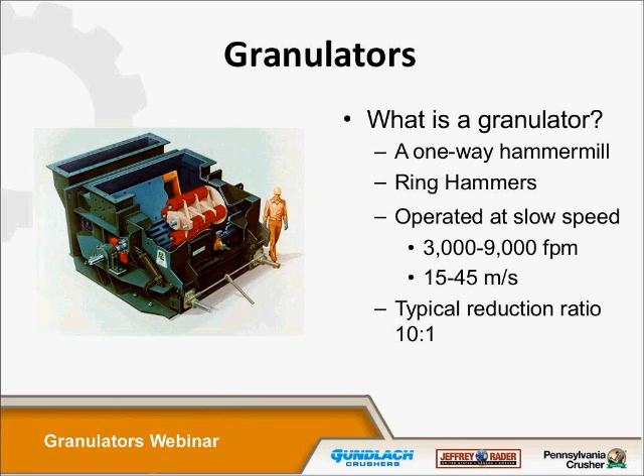Our presentation today is on granulators. Granulators are a very interesting product for us, a very old product. We have about 1,800 to 2,000 granulators in installation or in service throughout the world. What is a granulator? It's a one-way hammer mill with ring hammers, operated generally at slow speed of 3,000 to 9,000 feet per minute, or 15 to 45 meters per second. Typical reduction ratio is 10 to 1.

Granulators are typically used to reduce friable material. 95% or more of them are used to reduce coal. Input size is usually 6 inches or less, though it could go up to 12 inches in some applications. Our heavier duty models can go even 18 inches of input size. Typical output size is 1/2 inch or 12 millimeter up to even 2 inches.

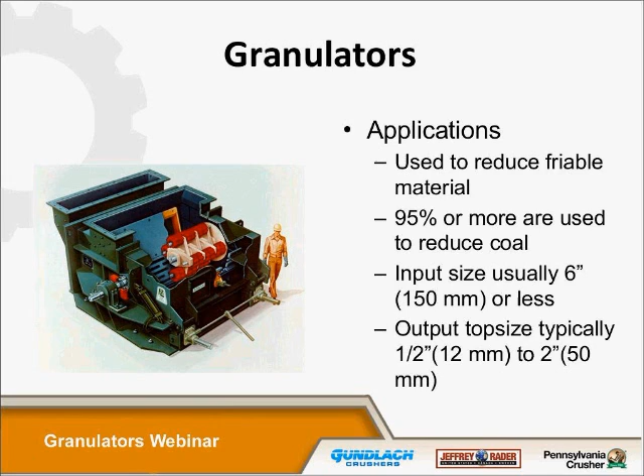Usual applications are in power plants, for instance PC boilers, pulverized coal boilers. These are the primary crushers at a power plant, usually preparing the fuel for the pulverizer, reducing the fuel from the train or the barge to prepare it for the pulverizer, and then from the pulverizer the coal gets blown into the boiler.

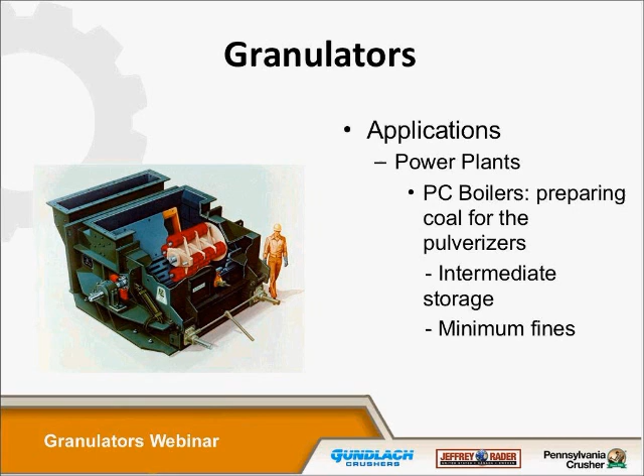Can also be used to reduce the coal prior to storage. An advantage is this type of machine gives minimum fines production, therefore less coal would be blown around on the coal pile.

Other applications would be a fluid bed boiler, in which case the granulator would be the final sizer before the boiler. It's a different type of boiler than the pulverized coal boiler, so product size from the granulator is a lot more critical with fluid bed boiler application.

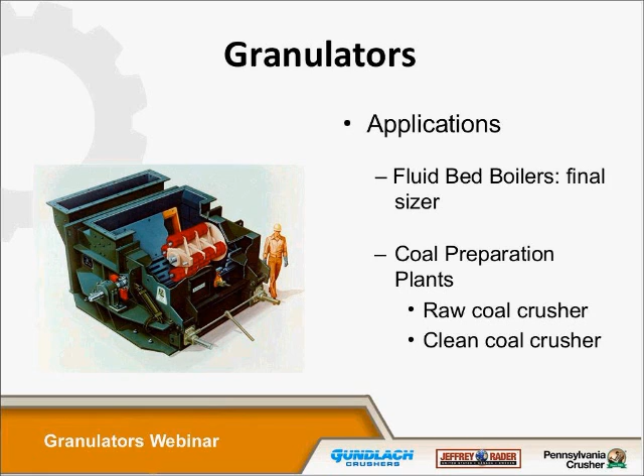Yet another application would be a coal preparation plant. Granulator could be used for crushing raw coal or even as a clean coal crusher to further allow processing of separation of the rock from the coal.

Now, referring back to Jack Loeb's original webinar, Crushing 101, we will look at the reduction methods that granulators use. Initial reduction is done through impact. As you can see with the arrow at the top, the hammer comes around, impacts the coal, and then the hammer rolls across the bed of coal and further crushes through rolling compression.

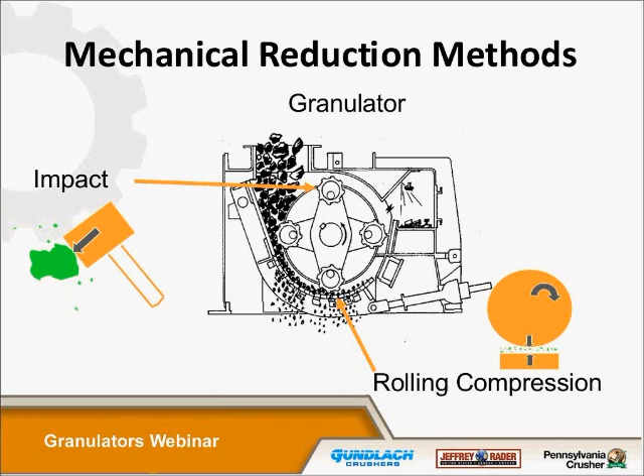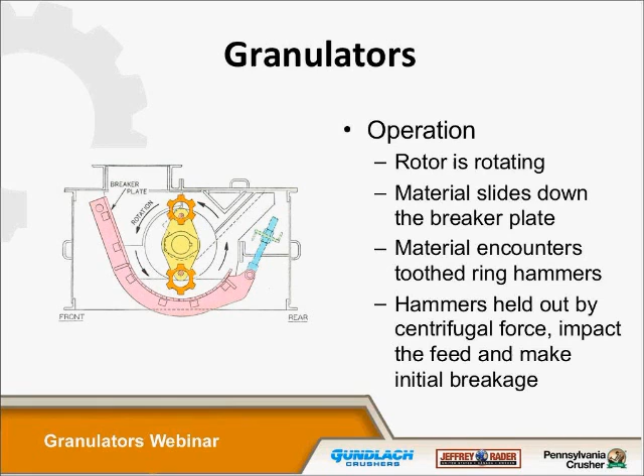General operation of a granulator: as the rotor rotates, you can see on the slide the rotor rotates counterclockwise. The material slides down the breaker plate, then the hammers encounter the material or impact the material. The hammers are held out by centrifugal force, impacting the feed and making the initial breakage. The hammers then begin to rotate on the bar, and as I mentioned before, you get rolling compression and further reduction.

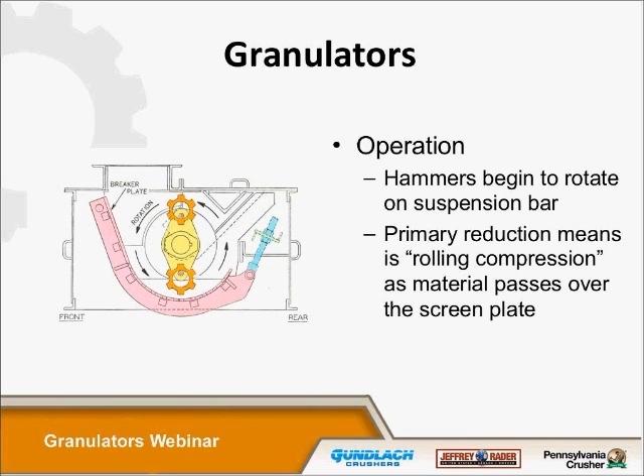The material is sized as it passes through the openings. All the material must exit through the screen plate, which means if there is a piece of uncrushable material in the feed, such as iron, then it will not exit through the screen plate if it is larger than the opening of the screen plate, in which case we allow the uncrushable material to be caught in the tramp iron pocket.

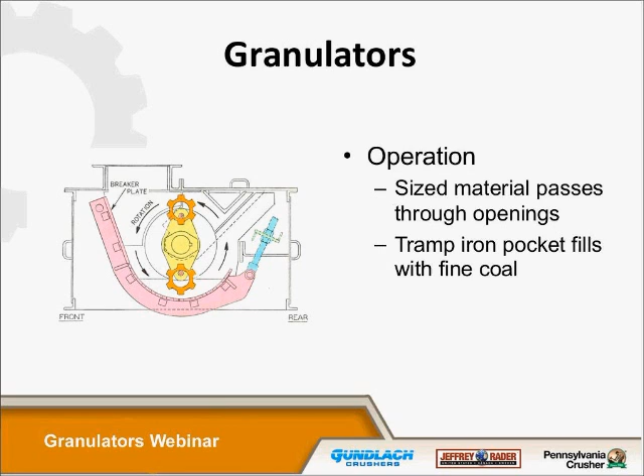Now this tramp iron pocket fills with coal fines. The coal fines actually absorb all of the energy that this piece of tramp iron would have. The tramp iron acts as a projectile, and the coal fines that fill up in the tramp iron pocket absorb that energy from that projectile. The uncrushables strike the deflector plate and become embedded in the tramp iron pocket.

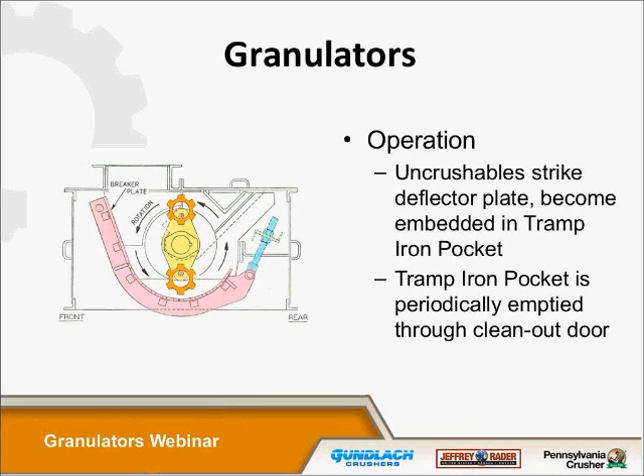Periodically, the tramp iron pocket needs to be emptied through the clean out door, which is on the right side of the picture. This tramp iron pocket typically is emptied once a day, could be emptied once a week. It really depends on the plant's operating procedures and the plant's experience of how much tramp iron they receive.

Operation is controlled by, the output size is controlled by screen plate openings. The openings vary with the type of coal and the product size required. Rotor speed also impacts the sizing, and the cage setting also impacts the sizing. So with a granulator, there are 3 methods of product size control: screen plate openings, rotor speed, and cage setting.

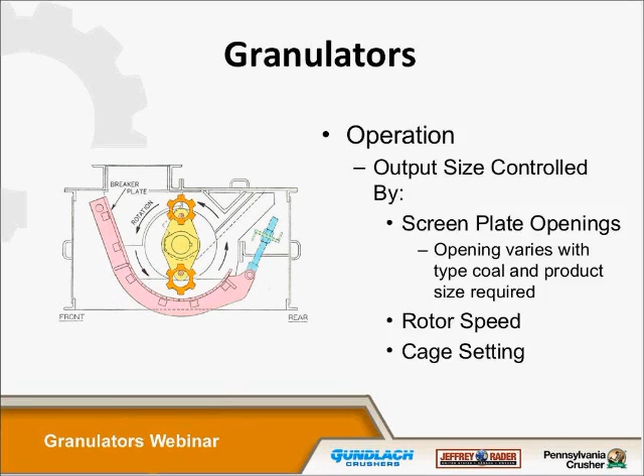Now, to adjust the cage: it is adjusted to compensate for wear of the crushing elements. It provides a little bit of variability in the product size.

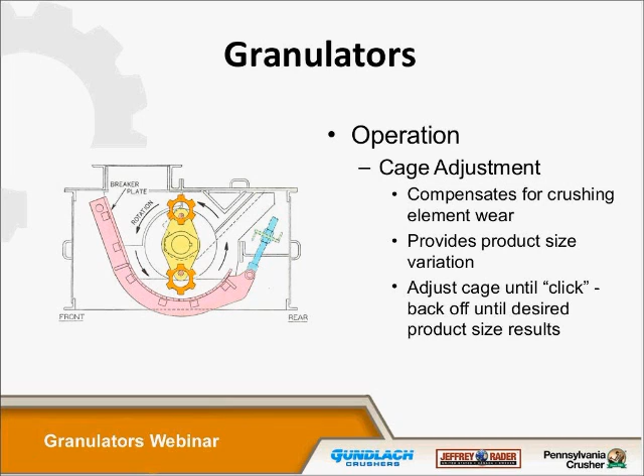Generally, the way that all of our crushers, our hammer-type crushers, are adjusted is by not feeding coal. You run the crusher empty, and then the cage is adjusted up to the point at which the cage starts to click the hammers. From there, the cage is backed off. The amount that is backed off depends on the plant's experience. It could be backed off 2 turns to get the correct product size at one plant, or at another plant they may determine 20 turns is the correct amount to back it off.

Now, the types of granulators that we produce are the TKK, which we will be discussing further on in this webinar. We also produce the TK, a machine designed for heavier feed, larger feed sizes, also for primary crushing applications. And very rarely we produce the JRK, which is a very small, almost a lab-size crusher.

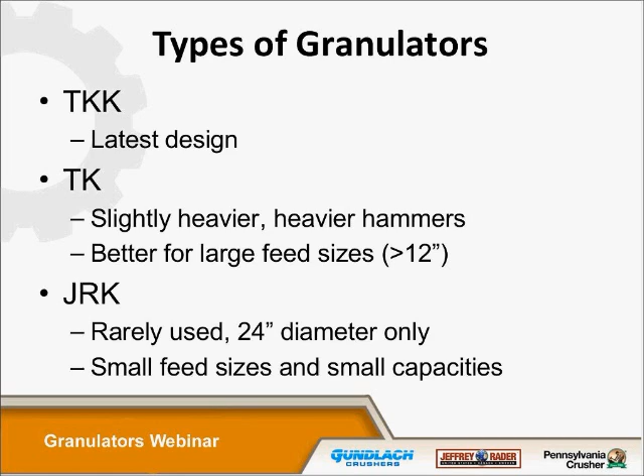Our model designation, as you can see at the bottom, is TKK, then the diameter of the rotor with the hammers extended, and the width of the screen plate designated in inches. For instance, a TKK 26 by 30 is a 26-inch diameter rotor and 30 inches wide.

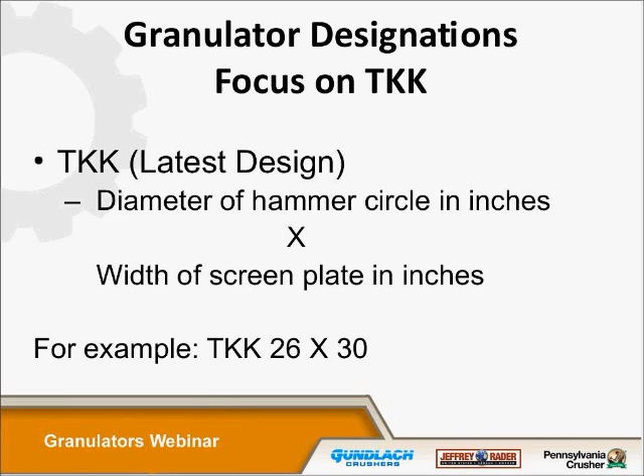Now, within the TKK, there are 3 designs. The largest design is the 44-inch and larger, so that could be a 44-inch rotor diameter, 48-inch rotor diameter, 60-inch rotor diameter, or even 72-inch rotor diameter. This design has 4 rows of hammers, typically a staggered pattern, which means the first row has a space between the 2 hammers, and then the second row fills in that space as the rotor rotates. So it's a staggered arrangement, and the hammers are typically 45 pounds.

Also the rear quadrant is hinged, and you'll see a picture of that. And we also have rear adjustment, or adjustment from outside.

The 36-inch diameter design has 3 rows of hammers, in-line arrangement, so it is not a staggered pattern. The gap between the hammers on the first row is not filled in by the second row of hammers. This is impossible since there's only 3 rows of hammers. Typically 27-pound hammers in the 36-inch diameter rotor, and we have a rear quadrant which is hinged.

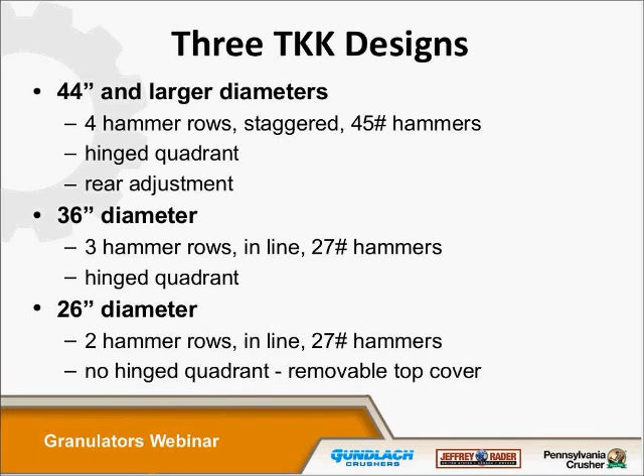On the 26-inch diameter, we have 2 rows of hammers. It's again an inline arrangement, 27-pound hammers, and no hinged rear quadrant. But because it's so light, we can remove the top cover by hand. And you'll see more pictures of each one of these designs.

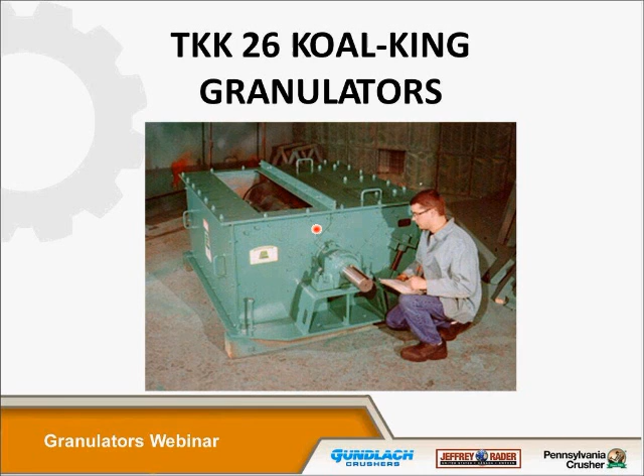Here is the cover for the rear quadrant, or the tramp iron pocket. Removing this cover, you'll be able to see the hammers and replace the hammers as needed. So further on, you'll see the fabricated steel shapes. Basically, it's a pretty simple design. The frame is made of fabrication, welded steel plate.

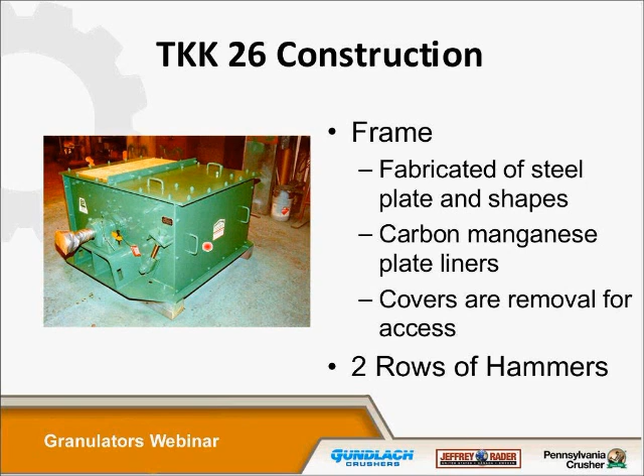We have carbon manganese plate liners and covers over the access panel, as I mentioned before. The rear quadrant cover here, and this is the cover for the tramp iron pocket.

Now the 36-inch granulator obviously is a larger machine. With this machine, you can see, again, this is the rear quadrant. So this rear quadrant actually is hinged at this point here, so the quadrant will actually open up. So someone could actually stand inside here with this rear quadrant open and work on the hammers, replace the hammers.

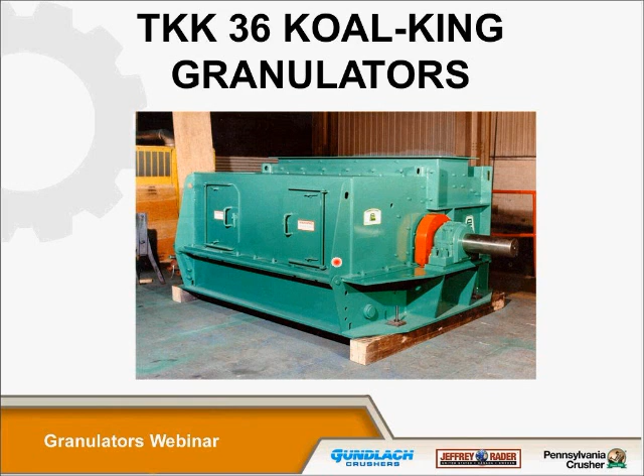Also shown here is the tramp iron pocket doors. So these doors can be opened on a daily basis. Again, the frame of all of our TKKs are fabricated steel shapes, welded together, with carbon manganese plate liners and a hinged rear quadrant.

You can see here a picture of the rear quadrant actually open. You can see at the bottom the hinge portion of the rear quadrant. You can also see there is very good access for the client to get to the rotor and lift the rotor up and out of the way as needed. The rotor doesn't always need to be lifted out of the way to replace the hammers or even to replace the screen plate, which I'll discuss further.

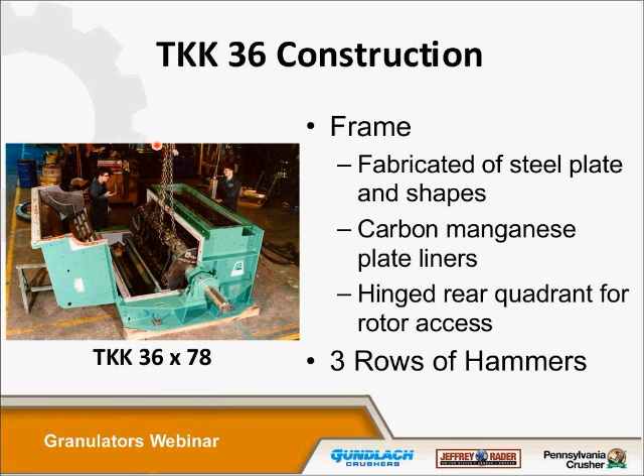Again, looking at the largest design of our TKK model, we have a frame, fabricated steel shapes, carbon manganese plate liners, hinged rear quadrant for rotor access and rotor removal. And on this model, we have an optional hydraulic door opener, which you can see right here. We have a hydraulic piston. This is a nice option for customers that are concerned about safety.

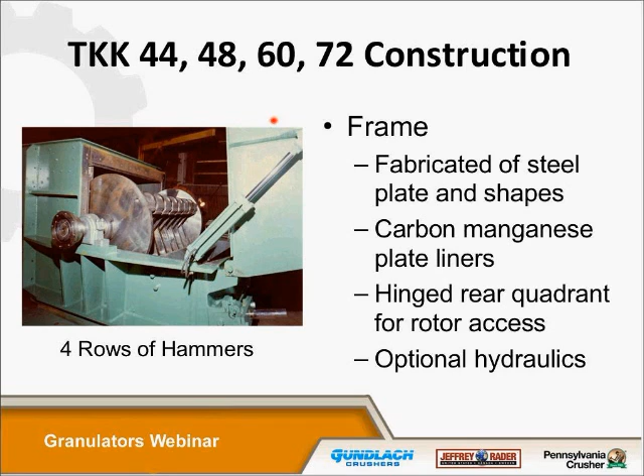Very simple operation. Previously, the customer would have to open the rear quadrant by suspending cables or chain from above. The customer would pull the chain, coming from one direction to open it. Once the center of gravity passes the hinge point, they would have to have a second chain from the other direction to keep it from falling down. So having the hydraulic door opener is a nice feature.

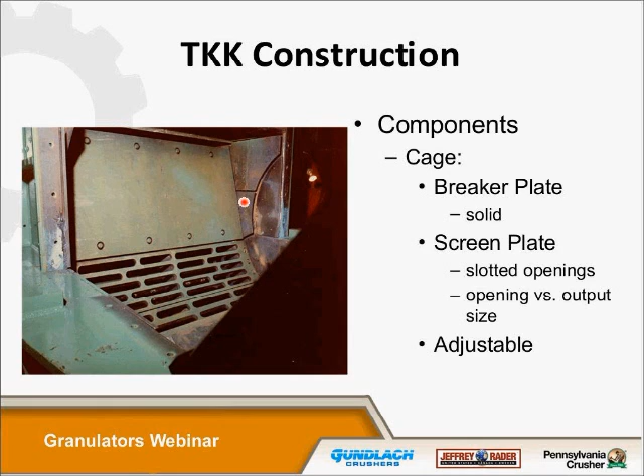Removing the front door of the granulator, you can see the back of the breaker plate and the cage frame. You'll also see the pivot point at the top.

So to remove the cage frame, if you would ever have to do that, the saddles of the cage frame can be unbolted and then you pull the cage frame directly out of the page.

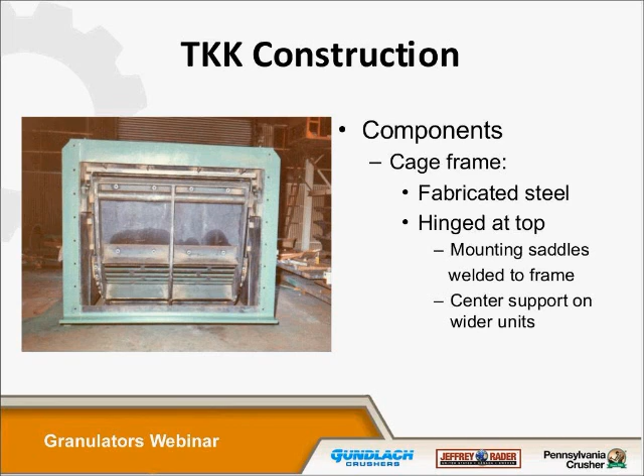On our larger units, you'll see a center support, which is necessary as the breaker plate gets wider. On our smaller units, you'll see we have adjustment for the breaker plate from the outside. This is a picture of the 26-inch granulator, so it's a very simple hand adjustment. There's an adjustment mechanism on both sides; here you see only one.

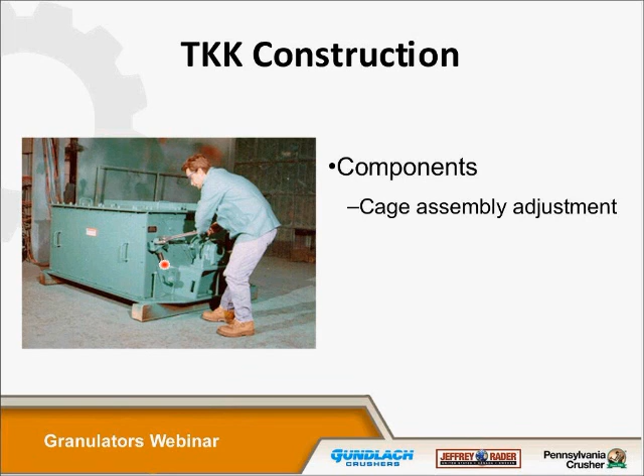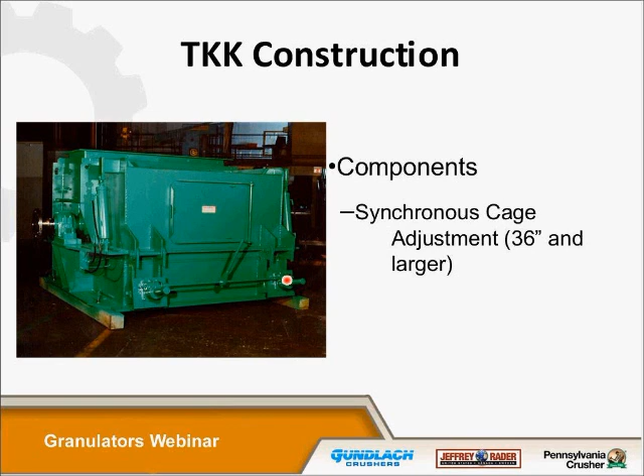On the 36-inch and larger, we have adjustment again from the outside, but a single point adjustment. Here is a picture of actually a 44 or 48-inch TKK granulator, and it actually has what we call synchronous cage adjustment, which is two gear jacks and then a ratchet device linked between the two. Therefore, only one point of adjustment on the largest units.

Again, this gives you a picture of what I was discussing earlier about the removal of the cage. The cage can be removed by removing the front door and then pulling the cage out from that side. This can be done without disturbing the rotor if need be.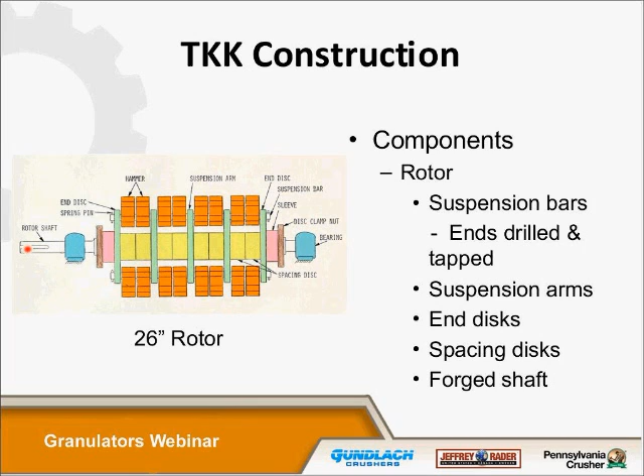The suspension bars are held by the suspension arms or suspension discs. In between the suspension discs, we have spacing discs, and at the end of the rotor stack, we have a disc clamp nut and a sleeve to compress the stack together. And then, of course, we have bearings on either side of the rotor shaft, and the drive connection, a keyed drive connection.

On the 26-inch granulator, you can see you remove the top cover and then the side frame, and you can easily remove the rotor from the cage frame. And the feed chute above does not need to be removed, which is a feature that a lot of our customers really appreciate. Saves them a lot of work.

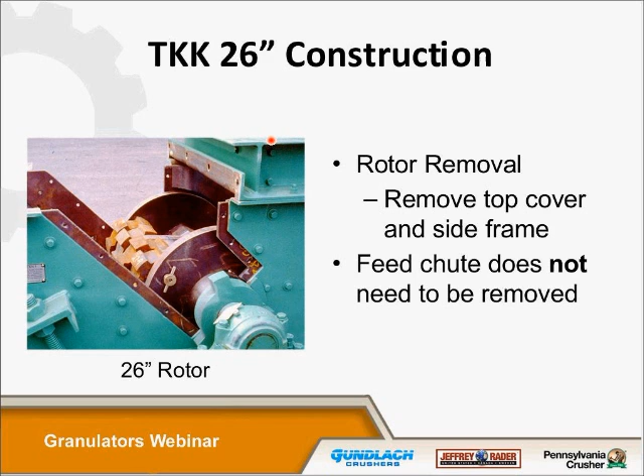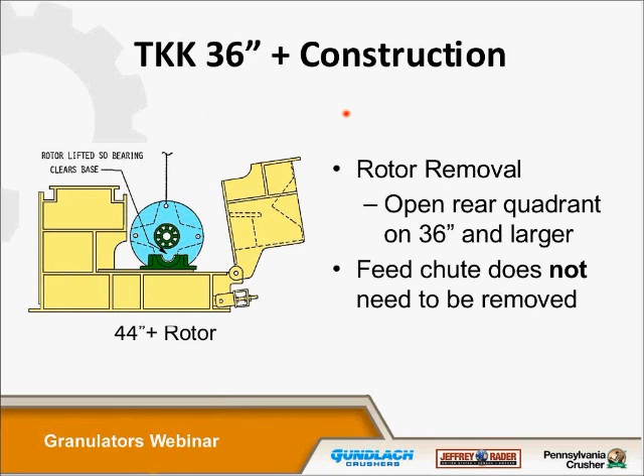On the 36-inch and larger, rotor removal is done by opening the rear quadrant, and then you can see you slide the rotor to one side, and then you lift the rotor out. Again, the feed chute does not need to be removed.

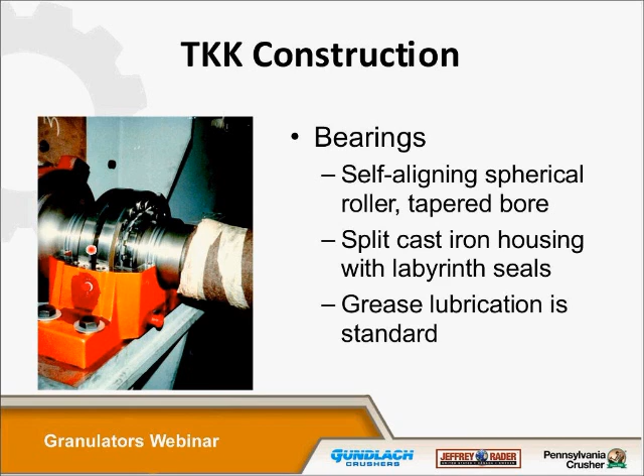Looking further into our bearings, they are self-aligning spherical roller bearings with a tapered bore. They're split cast iron housings with labyrinth seal, and the lubrication is done by grease, which is our standard, although we do infrequently do oil as required by the customer. Here you can see what the tapered bore looks like on the bearing race and the shaft.

We use a tapered bore, which will allow us to also pre-drill the bearing, the shaft, for hydraulic removal of the bearing. So you connect oil pressure here, and it pumps oil into the inside of the bearing race, and that pressure from the oil actually expands the inner bearing race and allows the bearing to be easily removed.

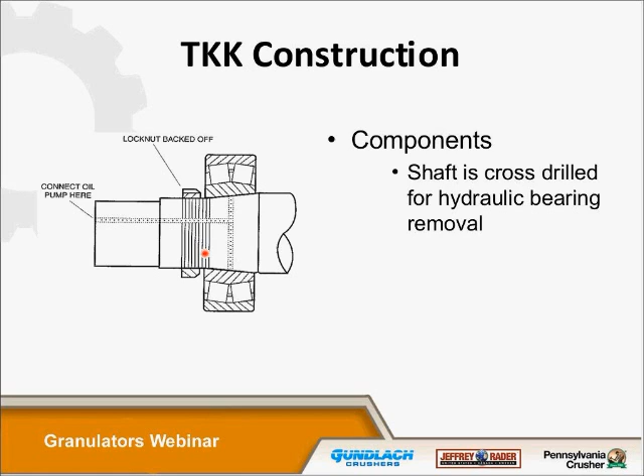Our ring hammers are forged alloy steel, heat treated to 300 or 350 Brinell hardness. Generally we have teeth on our hammers. The teeth allow the hammer to rotate along the bed of material, again to help promote crushing, the rolling crushing effect.

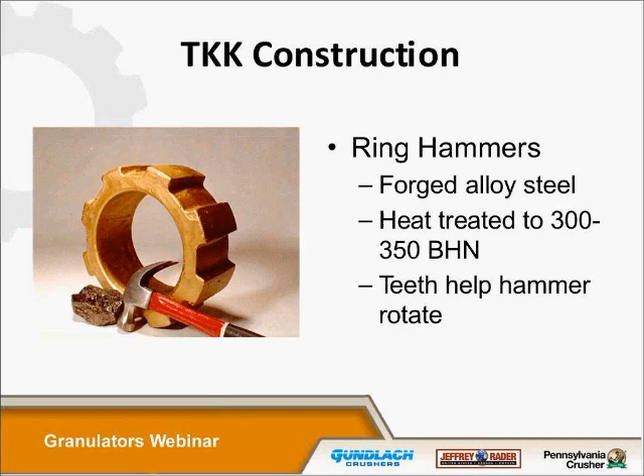So feeding requirements for a granulator are slightly different than a center-fed machine. If you tuned in on the impactor presentation or the hammer mill presentation, we want the feed to drop from a zero vertical or zero horizontal velocity. With a granulator, we want the material to slide down the breaker plate or slide down the feed chute into the crushing chamber, and typically we like to see 70 degrees on that angle, and 48 to 84 inches of drop height to allow for enough speed for the material to enter the hammer circle.

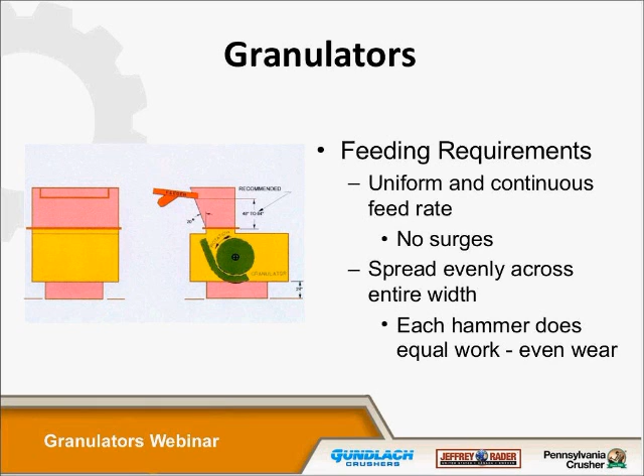We also want to see even feed all the way across the width of the rotor, so essentially each hammer does the same amount of work. The reason for this is for even wear. As the hammers wear, the breaker plate is adjusted in to compensate. Another reason is that if the crusher is only fed from 50% of the width, you can expect roughly 50% of the capacity from the crusher, which obviously customers don't want since they want 100% of the capacity. Therefore, we recommend 100% even width.

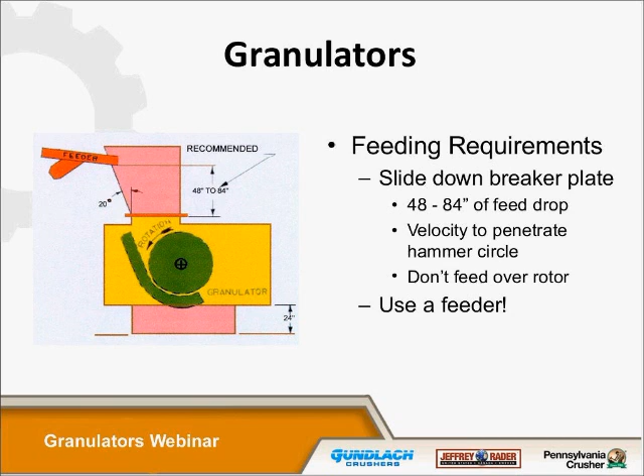Again, illustrating our feeding requirements of the feeder, of the material to slide down the feed chute and penetrate the hammer circle. So, with that, are there any unanswered questions about granulators or about feeding granulators?

Well, if there's no questions, I think I will end it right here. And I appreciate everyone's time.